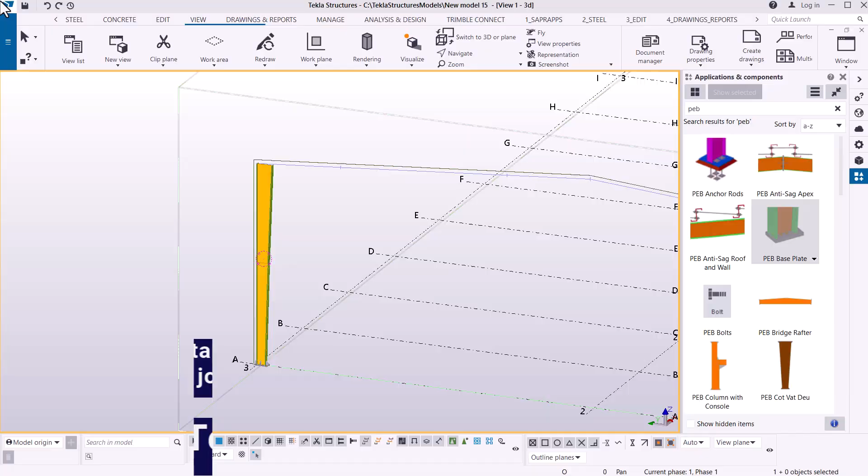Welcome back to the next topic, five of our content. And this is all about tapered column and rafter knee joint and splice detailing in Tekla Structures.

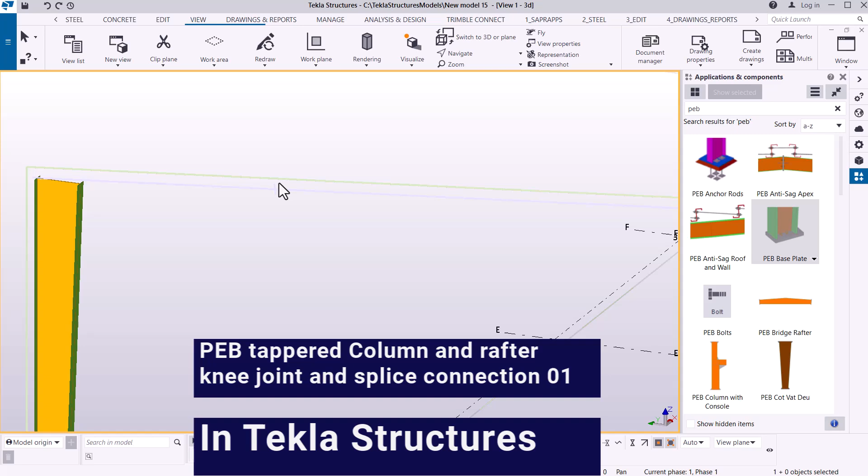Now, if you take a look on the screen here, you can see we had worked on our previous column. And now I'm going to fix my first rafter here. So I'll be using the points that we had segmented initially to identify the location of the splices on the rafters, as we did on the column here.

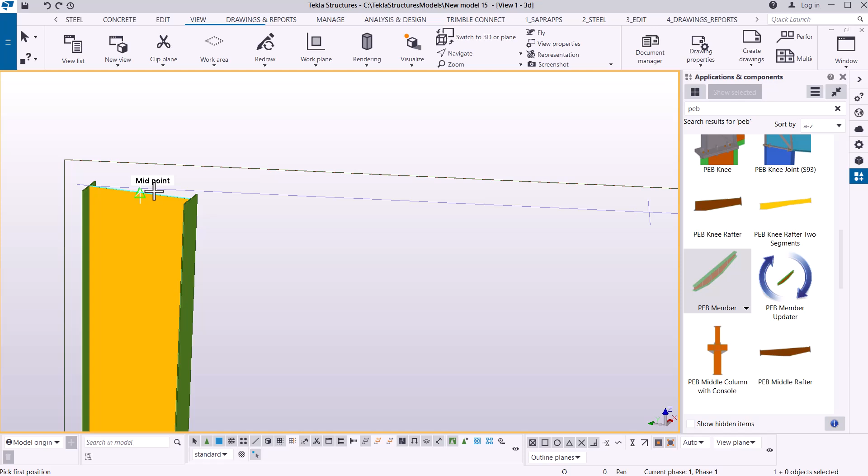So I'm going to scroll under my applications and components pane here. I'll scroll up and pick on PEB member. So under PEB member, I'll just place my cursor close to the point I want to terminate it on. I'll click on that, then move all the way to that spot here and click on that. So I'll right click once again and click interrupt to terminate that command.

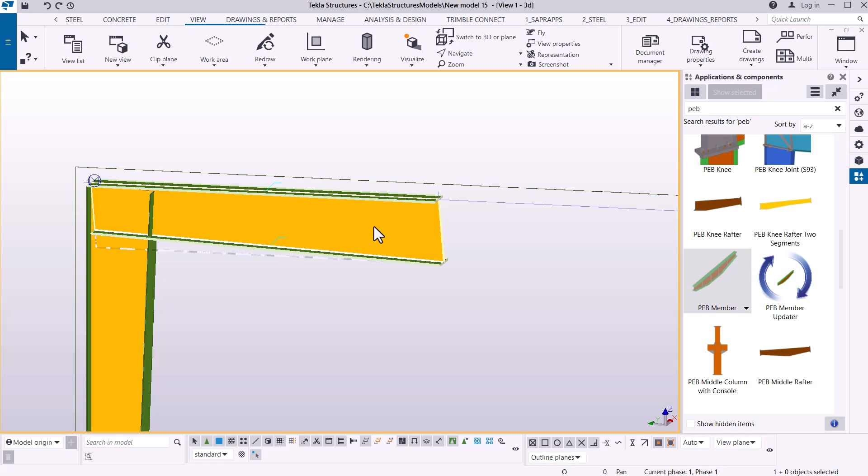So you can see by default, I want this tapered side to come to this far end. So I'll just double click on it and give it some time to process that information. And from there, I'll have my editor dialog box. From the editor dialog box, I'll be able to key in the right information to switch this tapered side to the other section of the tapered column.

Now it's just about to come up, and here we have it, and you can see the D0 and D1. So this will be my D1. So under D1 here, I want to switch the information right here. Just copy that and paste it here.

If I paste it here and just change this to 600 and click modify, that will change the shape of this particular member here, and we'll see the taper switching from this end to that far end, and we'll be able to now start our connection from that spot.

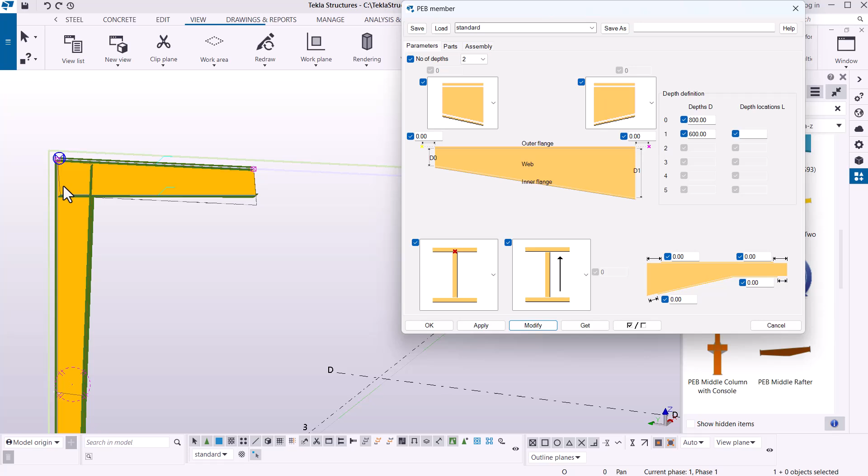So you can see we have our steel line still intact, because when we begin placement of the purlins, we don't want to pass this line. So that's why it's called steel line. And the same applies to the column. When we start placement of the girts, we don't want our girt to pass that line. So we just constrain it to those lines. So I have that in place.

So I want also to create another rafter, but this time it will be straight, not tapered. So I'm going to close this. Once I've closed that, I'll come back here and pick on a PEB member and just place my mouse here, and it will detect that snap.

And that snap only appears when you enable these buttons here. You just mouse over them, see the information available there, and enable them so that you'll be able to see the snaps. So if I mouse over that, you can see that snap; make them active. That's when you'll be able to see them.

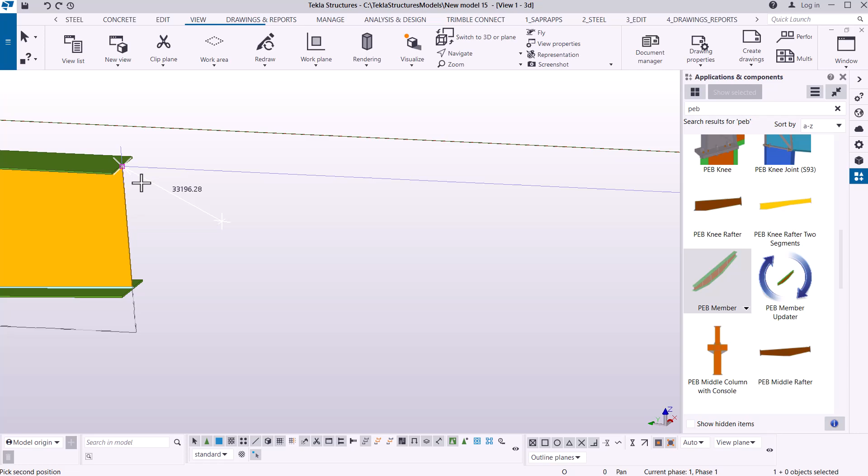So let me just mouse over close to that point, and I'll click and come all the way to this section here, mouse over close to it and click on that. So we have that taper, but this time we don't need a taper anymore. So I'm going to double click on it and then make it a straight rafter by switching everything to

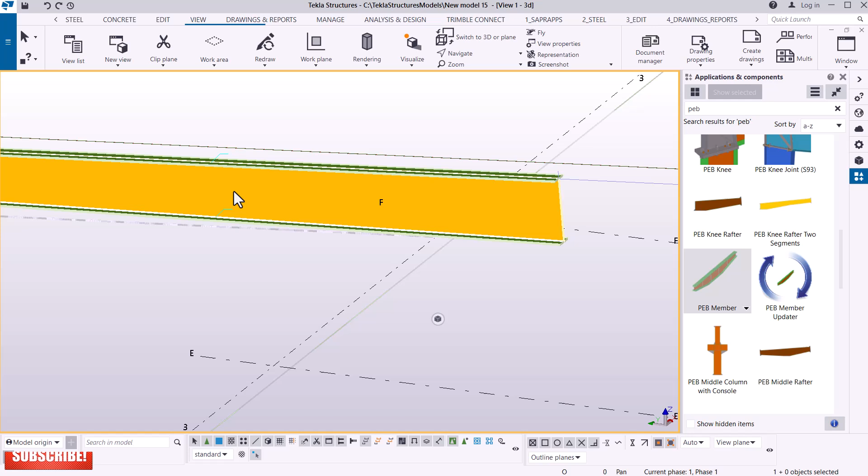600 depth of the column. So let me just give some time to process that information, and we'll have our dialog box in place in just a few seconds. Then from there, we'll be able to key in the right information. So let me just change this to 600, click modify, and apply.

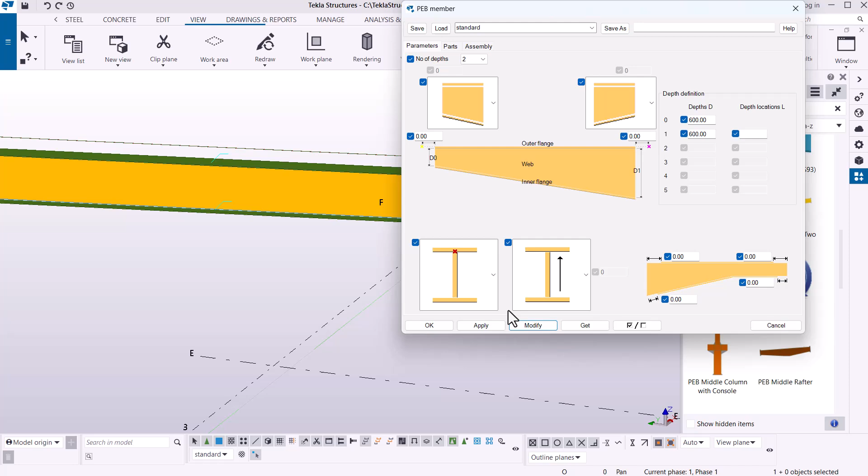Remember, there are more options here, where if you're interested in changing the thickness of the flange and the web, we just come to parts and key in the right information there, and you'll be able to change everything. So I can just go ahead and click apply and give it an OK the way it is.

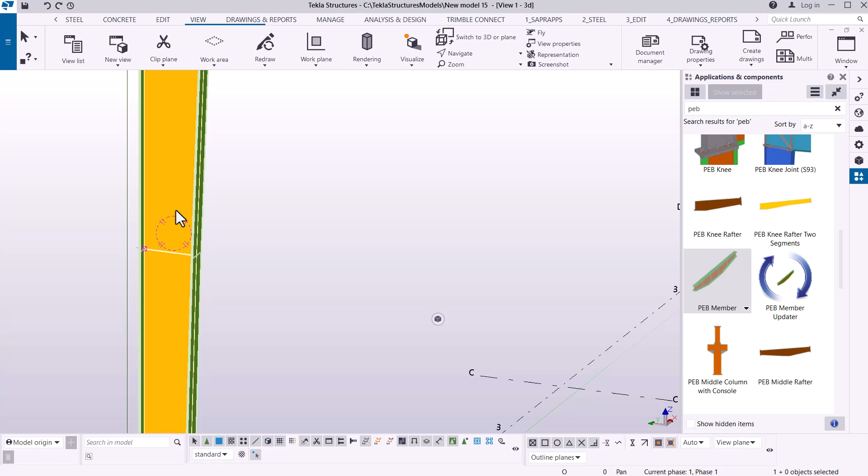What we want to deal with is splicing these two components, and also creating a joint connection here, a knee joint connection here, and splice this, and the other one will be done later on.

So I'll come to splice. I'll scroll down and look for the tool splice. I'll scroll down and pick on PEB splice and pick on it. Just left click on it to select it.

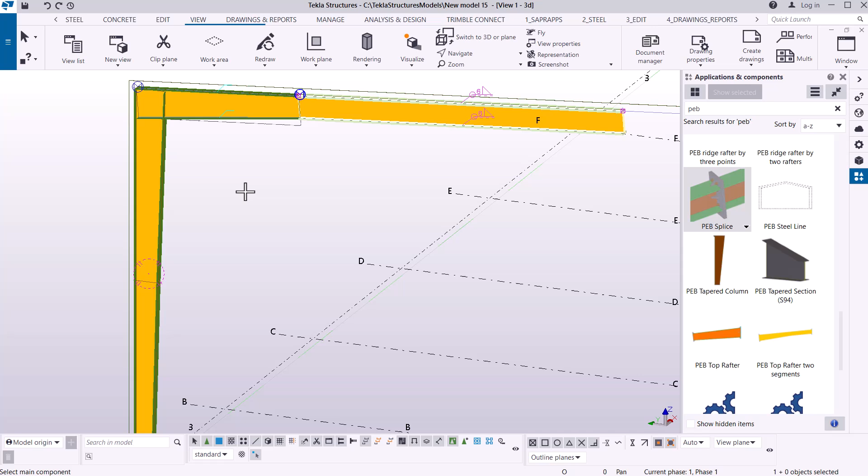The moment you select it, you'll see your cursor changing to a plus sign, which means it has carried the information with it. So we just wait to select the main component. You can see select main component. So the main component will be this, the bigger one.

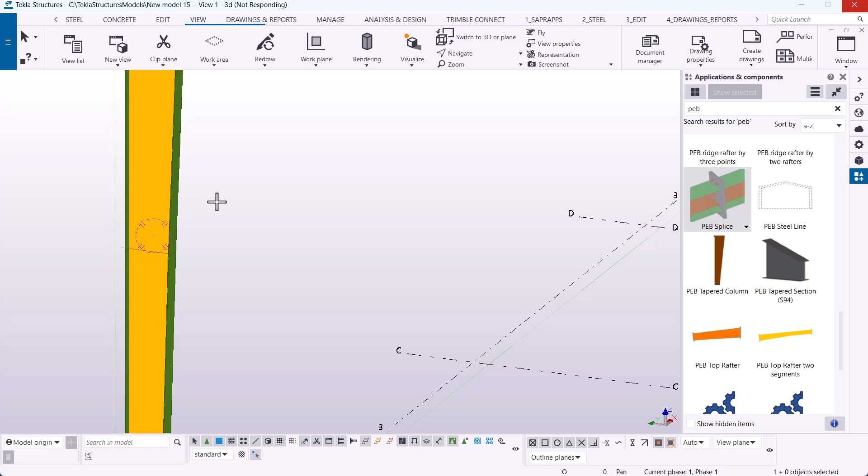Then we come to this, the smaller one right there, and right click and just wait. You will see a preview of the connection. Let's just give it a few seconds to process that information. From there we'll be able to edit that default connection that we have on the screen here.

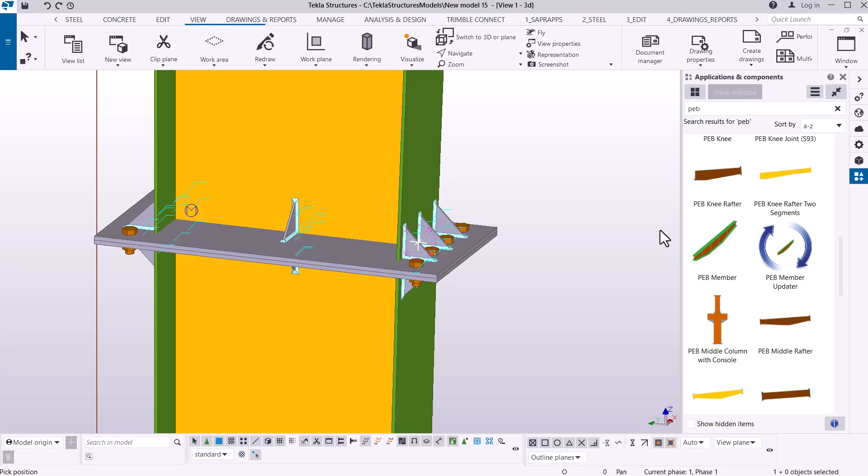If I zoom closer, you'll be able to see we have this default splice connection here. This is not the best, but you can always come here and click PEB member updater. If I click on that, I'll be able to update that and come with the right one.

So I'll come to navigate here and click on that, right click and rotate this, so you can see the stiffeners on this far end. But it doesn't look good for me, and that's the reason why I want to modify this.

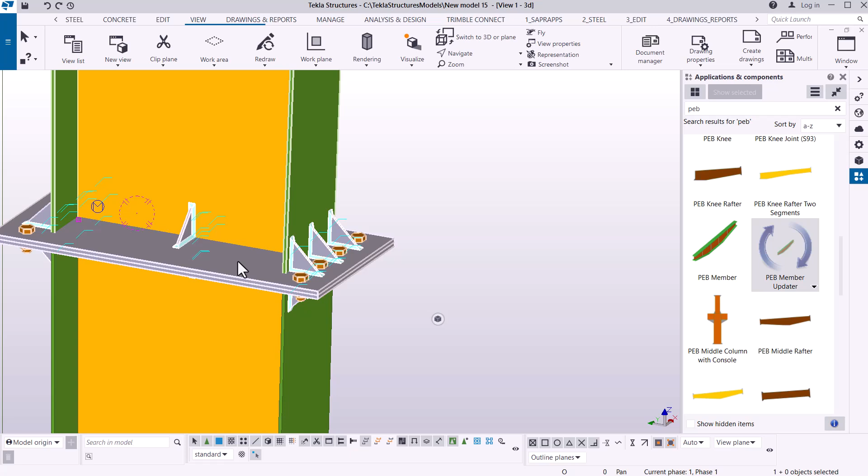So I'll just double click on it. The reason why you double click on that is for it to bring forth or bring up the editor dialog box. This editor dialog box, or you can call it property dialog box, is for that particular connection here.

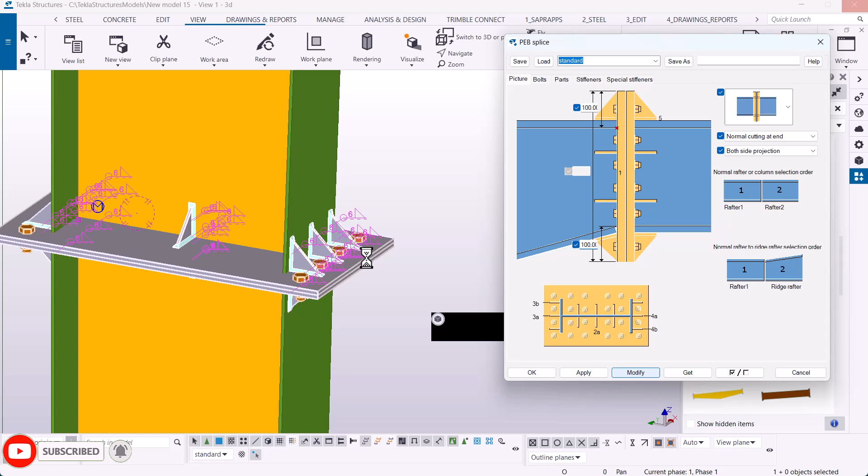So we can change this maybe to 100, and maybe this one also we can change that to 100, and come here and click modify. And if you come here, you can see it will respond to the changes you just key in here, because we don't need this much extension protruding outward.

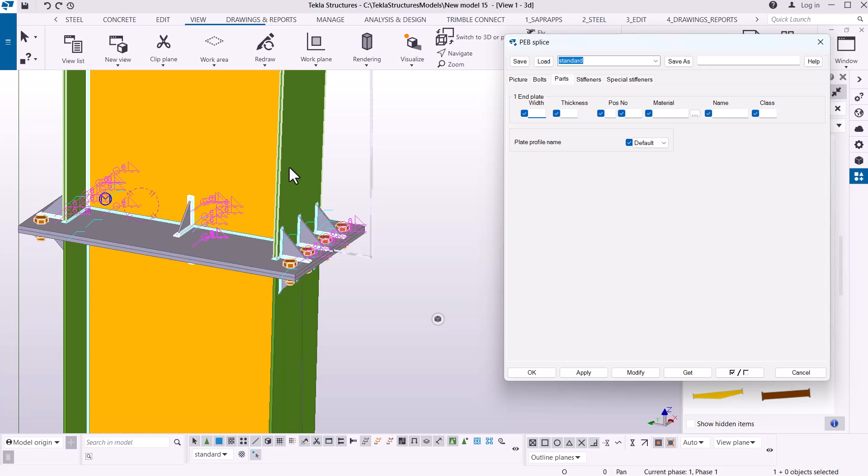But the width of this is dependent on the width of the column. So you can just key in here maybe 250 right there. If I click 250 right there and click OK, it will adjust itself accordingly to the size.

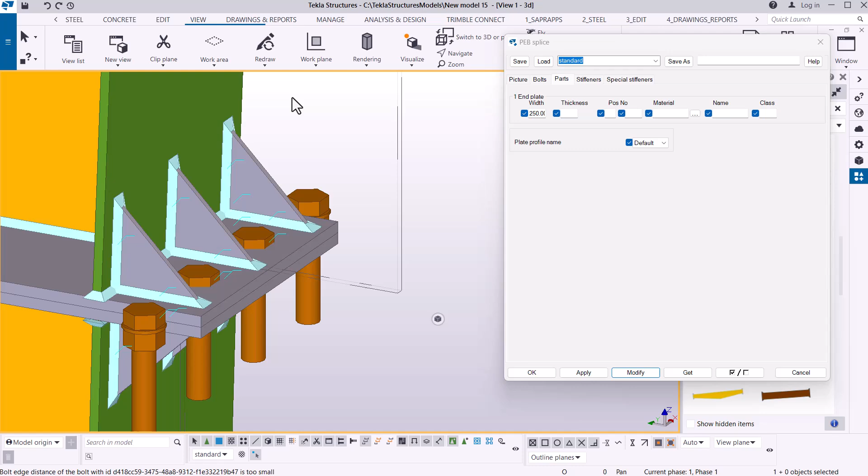But it's kind of going beyond our preferred settings, but we're just within, and that's okay. Now the bolts are just the ones that have been left out.

The thickness here, we can just give a thickness maybe 10 millimeter right there, and go ahead and click apply. And if you want to add material, just click on that radio button there and come to material still here.

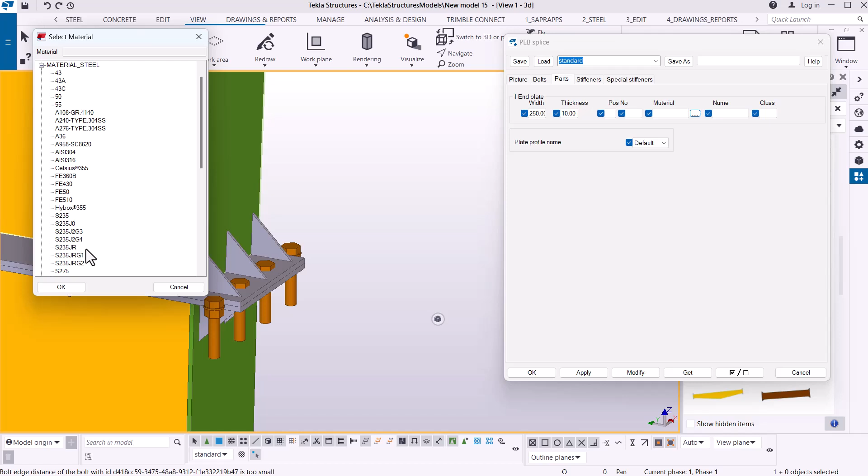And pick the standard material of your preferred choice. So I'll always pick that and click OK. So I have that in place.

You can also define that by just typing it, maybe a splice, or SP right there, and you can describe it, giving it a name of your choice. Then I'll just go ahead and click apply.

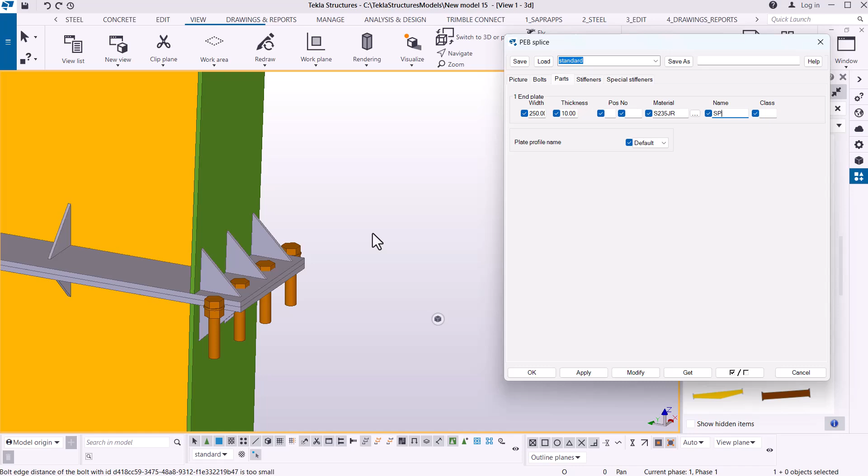But I cannot click apply prior to changing the stiffeners here. So luckily enough, I have my preferred settings that I had created before, and if I come here and pick on splice, I can go ahead and click load. This will load the settings that I had keyed in initially, so you can see the settings that I had loaded.

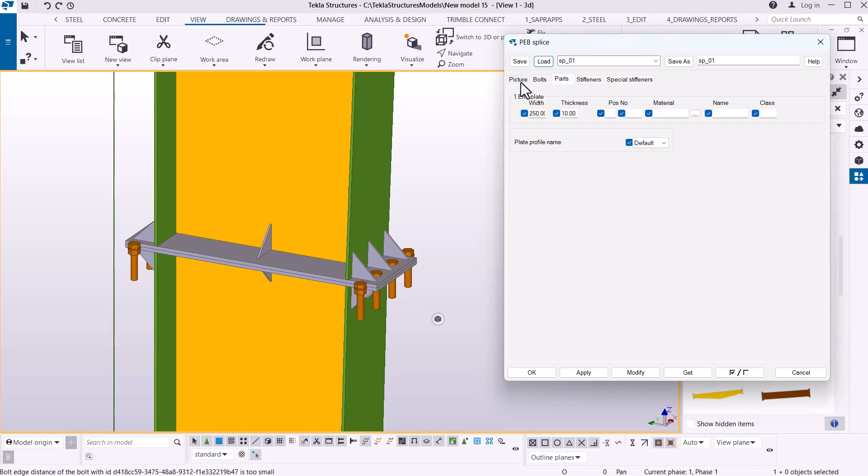If I come to picture here, you can see I had keyed in 90 millimeter, and there's the bottom end here, 90 millimeter. So the projection, I left it at both side projection to be normal, but not a total length and projection. Let's try total length and projection and see how it behaves.

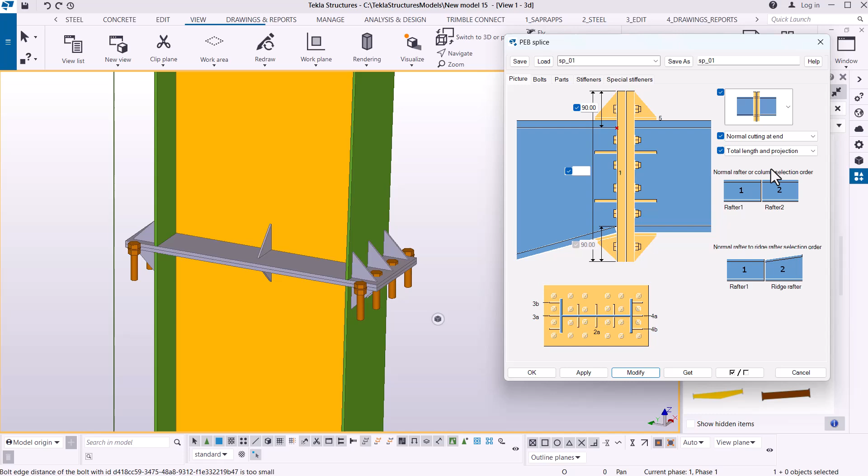So it hasn't responded because our connection, our splice, is not linked up with our editor dialog box. So let me just double click on it so that it creates a link.

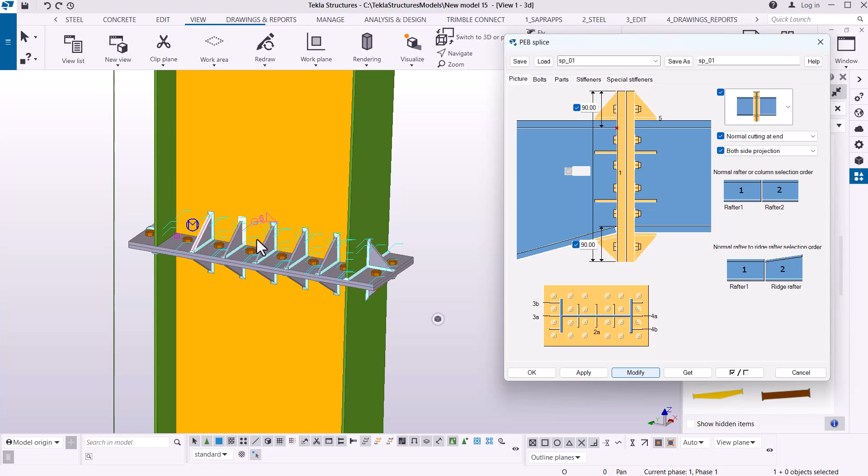Now I'll come here and come to that spot and pick SP_01, because I had created this preset before. So I'll just go ahead and click load and click modify. If I click modify, it will pick my previous settings that I had created.

So if I come to navigate, click rotate with mouse and pick my rotation point, I'll be able to turn that around. The important thing here is I want to share with you the settings I created for this particular preset connection of a splice connection.

So if I come to the tab here, you can see what I had chosen and keyed in to define that kind of splice preset connection that I had created.

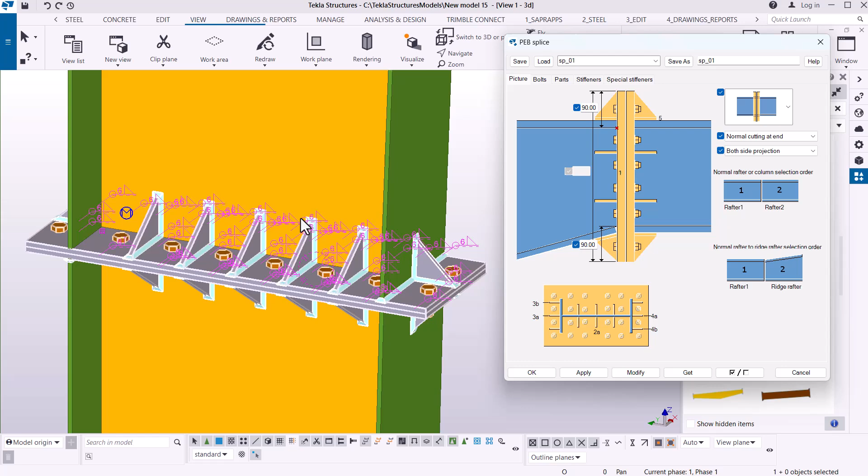If I come to bolt here, on the bolt tab, you can see what I had keyed in to come up with that. And also, if maybe I want more details, I can add tolerance there, and that's okay. But anything I add here, I'll click save as, so that it's included as a detail on my preset.

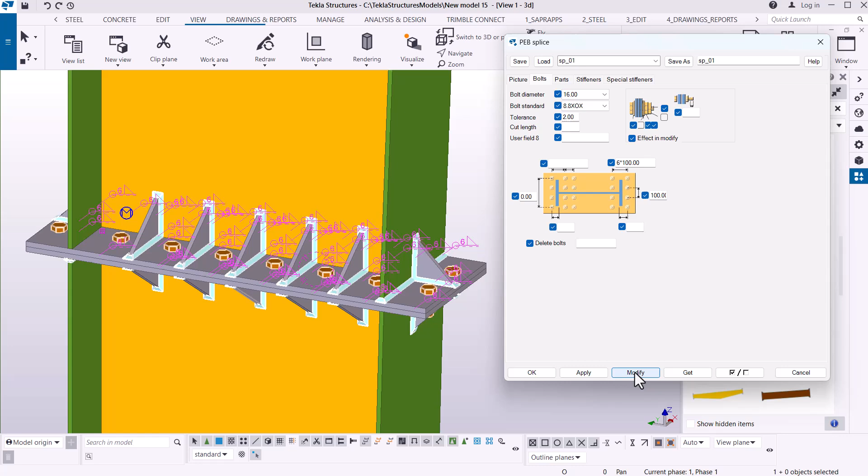So I'll just go ahead and click load. It will be added there. So let me add the washers and click modify. So I have that in place.

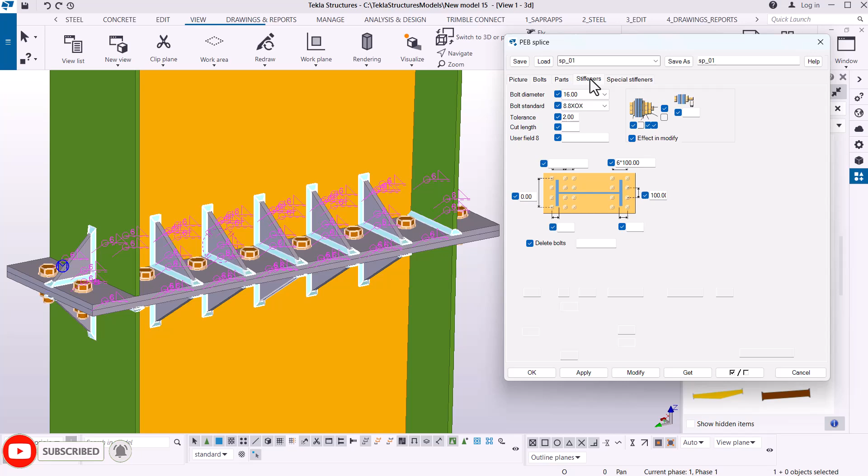And maybe I'm not pleased at all with how the stiffeners look, so maybe I want to change this one also. I'll come to stiffeners here. Under the stiffeners tab, I'll be able to get the details on how I can manipulate these stiffeners.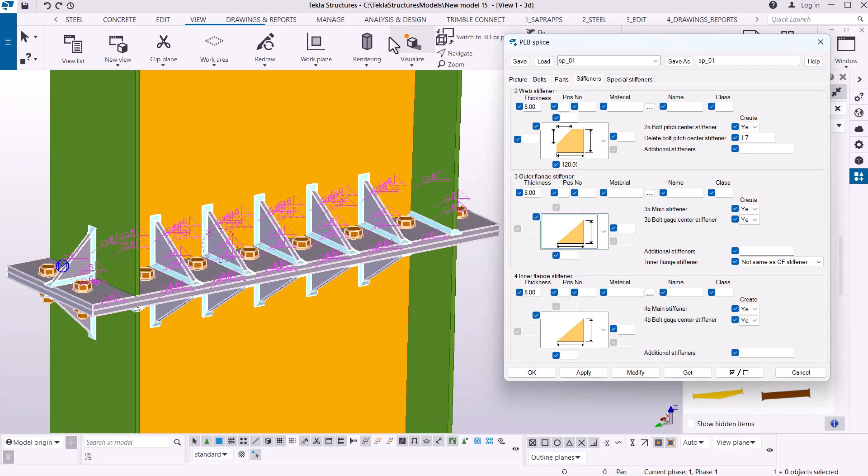So what I'm going to do, I'm going under stiffeners here, and the first one, on the web stiffeners, I'll click on that drop down arrow and pick a different one. And this one also, I'll pick a different one here. Let me just drag this aside so I'll be able to see what I'm trying to explain accurately. So let me click on that and I'll pick a different one like that.

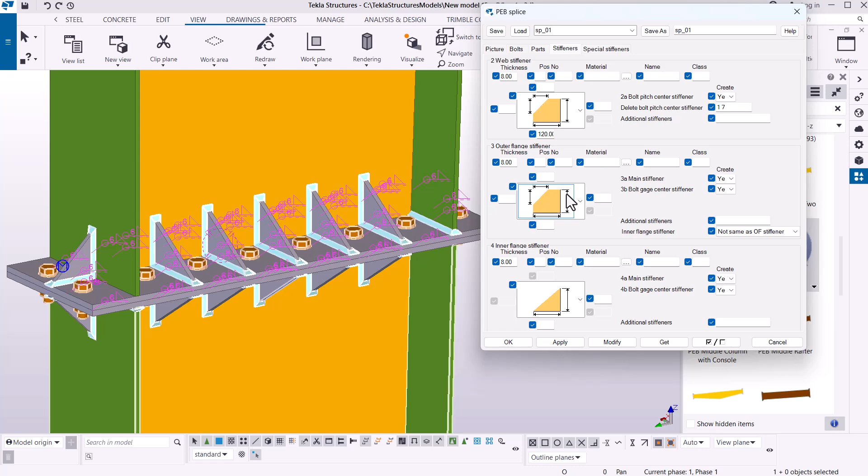So in here, I'm going to key in the chamfers, and also the thickness. But the thickness, we already have 8, 8, 8 for all. So let me just click modify. If you click modify, this will respond and it will take a different profile.

So you can always go ahead and change this, change the chamfers. Maybe I can key in 30 - that will be too small. Let me key in 50, right there. And the same applies here, and the same applies here.

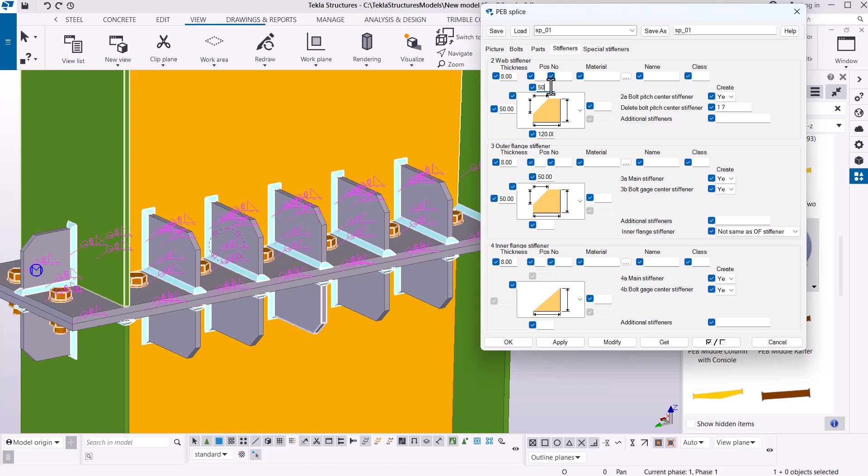So once I've done that, I'll go ahead and click modify, and the changes will be reflected here. If I come to navigate and pick rotate with mouse, left click and hold, I'll be able to rotate that, and you can see it turns like that.

So if I come to picture or bolts here, you can see - I'll repeat once again - how I ended up doing that. And that's what you can follow up and try to play around with that splice joint, and you'll be able to create something similar to that.

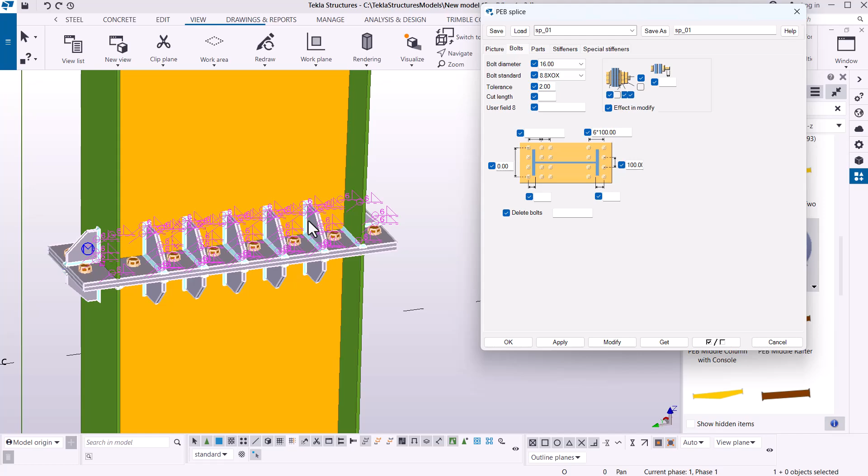So let's meet then on the next presentation. Now we'll be handling the knee joint and also another splice there, and move to a different topic from there then.